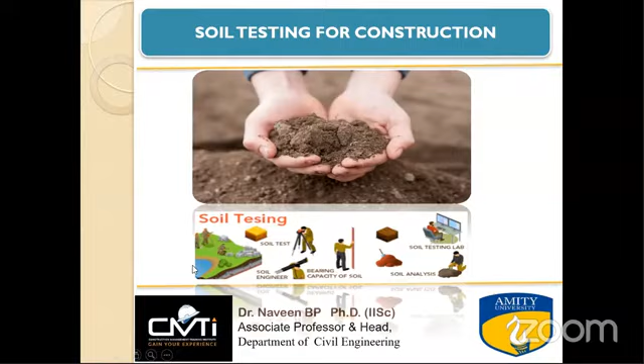And now you are a budding engineer, so you will be going to the interview, or if you suddenly go to the site, someone may ask how to differentiate the sand, silt, and clay, or how to identify the soils. So you should have some thumb rules. Spontaneously, you should be able to identify and answer the questions.

Or a labor may ask, sir, can I terminate the depth of the borehole, or can I stop the boring? As a site engineer or a design engineer, whoever it may be, first you should try to take the soil and feel what type of soil it exactly is, and whether what is coming in the soil report and what you are getting at your current location when you are doing the drilling are the same or not. You should be able to interpret spontaneously and give the decision. There, this field test will play a major role.

Then sieve analysis to make out the type of soil exactly, sand, silt, or clay, how much percentage, and you will be telling whether it is coarse grained or not. Then for construction purpose, another major field test is bulk density. To calculate that, we will be going for the sand replacement method. Then another is compaction, which plays a major role. Then plate load test, then pile load test. This session, I'm only touching the main field testing. These are the very important tests. I'm not discussing the laboratory tests; that I will be covering in the next session.

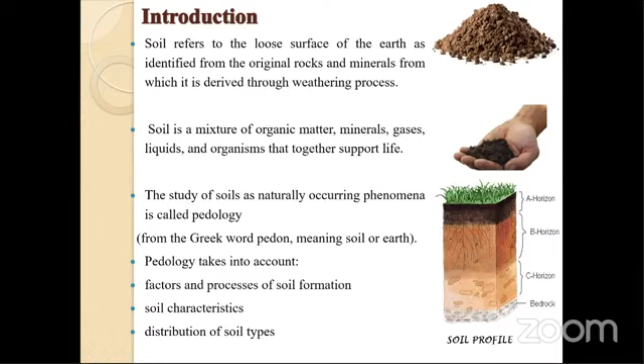So you can see the top layer will be decomposed and this will be the soil. It always depends on the parent material and the minerals it contains, and this is the bedrock where the soil will be formed. That is residual soil as well as transported soil. Before going further, we have to understand how soil is formed. Soil is formed by weathering of rock only, and rock is classified into three major categories: igneous, sedimentary, and metamorphic. This is the process of the rock cycle.

First is magma. The interior of the earth is in a molten state, and that is called magma. Then rocks are formed due to the cooling of this molten material, and these rocks are broken down into soil, and the soil will be converted back into rock. This cycle is called the geological cycle. It takes these 9 steps: magma, crystallization, igneous rock, erosion, sedimentation, sediments and sedimentary rocks, then tectonic burial, metamorphic rocks, and melting. This is the formation.

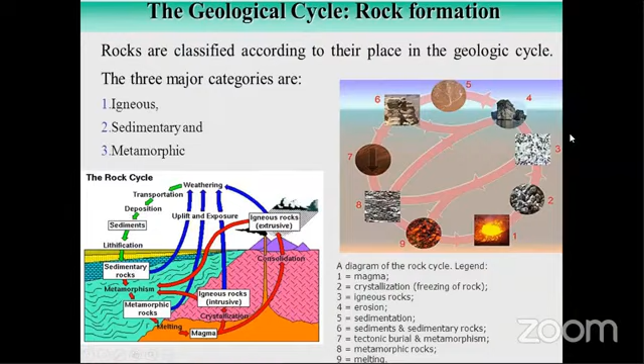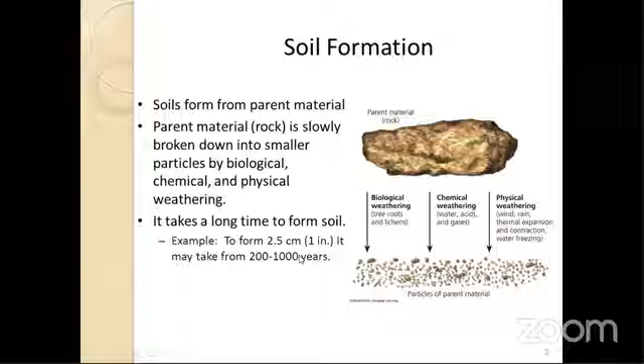See, I told you soil formation is derived from this parent rock because of this weathering action. This is physical weathering; it may be due to wind, rain, thermal expansion. And chemical weathering is nothing but water, acid, and gases. And biological weathering is because of plant roots, everything. You can see, if you want to get 2.5 centimeters of soil, it will take 200 to 1000 years. It will take a long time. See the duration. That's why I was telling.

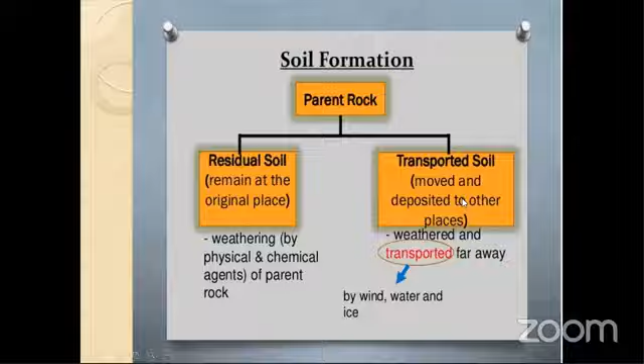Now, this is the rock formation. The main thing is always the parent rock. From the parent rock only, the soil is derived. These are the two major things. One is called residual soil. The residual soil is nothing but the soil which resides at its original place only. That is called residual soil. And this is affected by the physical and chemical agents of the parent rock. And similarly, the transported soil, the name itself indicates it is moved and deposited to another place. The agencies are wind, water, and ice.

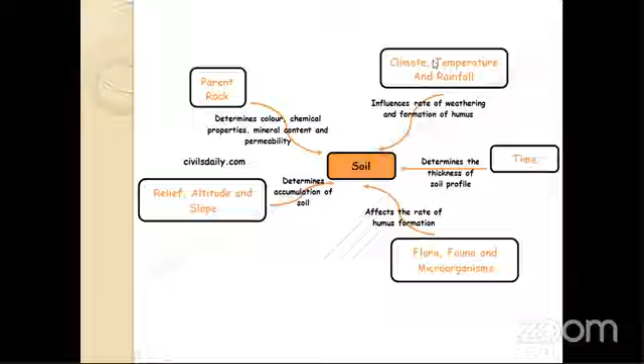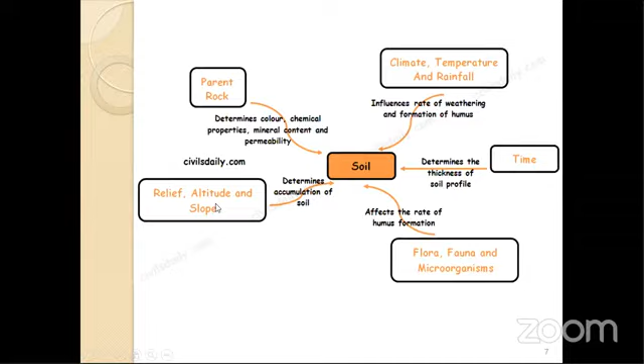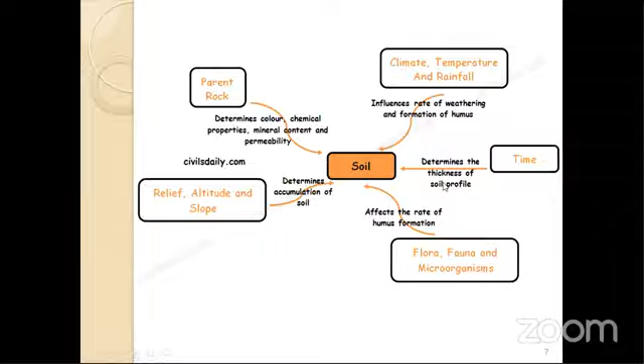And also with respect to time, the layer is decided. If the layer is 2 meters, 3 meters, all will be decided by this. And also topography will decide. Topography is nothing but the slopes, the grade of the slope affecting drainage, erosion, deposition. And climatic condition. This affects the rate of weathering and organic decomposition. So these are the 5 important interacting factors affecting soil formation.

Now, coming to types of soil, you have 6 types. Sandy soil is large in particle, dry and gritty, and has high permeability. In geotechnical terms, as per the thumb rule, it will be 10 to the power of minus 4. And silt is a much smaller particle than sandy material, moisture retentive and drains poorly. When you touch it, it has a soapy texture when wet. And clay, compared to this, is a very fine particle with good water storage quality and low permeability. Here, the permeability value will be 10 to the power of minus 6. Here, it will be 10 to the power of minus 9.

How I am telling minus 5, minus 9, minus 4 is because as civil engineers, we perform a permeability test. On that basis we are able to differentiate the permeability, and based on that we recommend for construction purposes. And the behavior is sticky when wet and smooth when dry. And peat looks dark brown and black in color, has a high water content and is rich in organic matter.

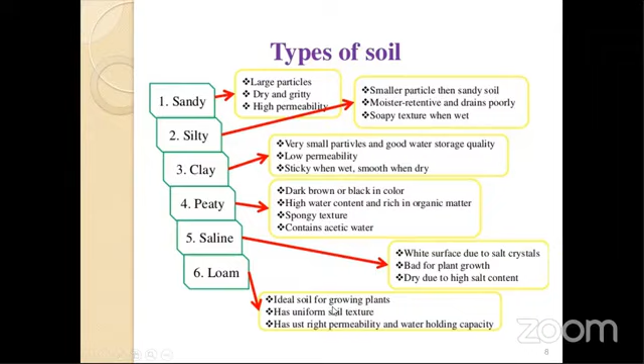And saline soil has a white surface because of salt crystals, is bad for plant growth, and is dry due to the high salt content. And loam, a medium mixture, is the ideal soil for growing. It is a mixture of sand, silt, and clay in proportion with a uniform soil texture, and has the right permeability and water holding capacity. That's why it is good for agricultural or plantation purposes. Now, we will be going to discuss particularly the civil engineering aspect.

Now we are coming to the fine soil. Sand will range in the range of 0.05 to 2 mm. Silt will be 0.002 to 0.05 mm. And clay is less than 2 micron. When you compare, sand is the largest, silt is less than sand, and clay is always the least.

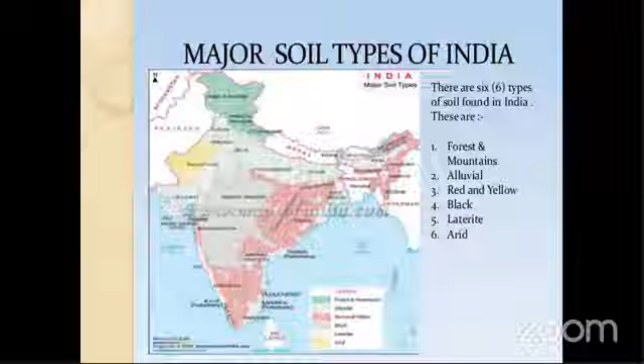This is called alluvial soil. This soil is transported from its place of disintegration by flowing water and deposited along the way. It's known as alluvium. This soil contains a lot of minerals and humus, which makes the soil fertile. This type of soil is identified in Punjab, Haryana, Assam, UP, and Bihar.

Next is black cotton soil, also known as regur. These are black volcanic soils found largely in Karnataka, Raichur, MP, Maharashtra, and southern Gujarat. This soil is quite suitable for cotton. Black cotton soils are highly expansive and not suitable for construction purposes.

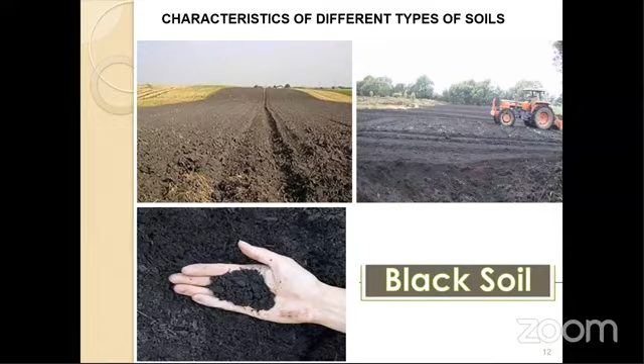Now coming to red soil. Red soils are generally found in Karnataka, Orissa, Tamil Nadu, especially southern Karnataka, southeastern Andhra Pradesh, Manipur, Mizoram, Meghalaya, and Nagaland. These are derived from acid granites. Red soils are always rich in potash and poor in lime and phosphate, mainly due to siliceous and aluminous composition with sand and free quartz.

The red soils are not very fertile. The red color of the soil is not due to high iron content, but is due to a diffusion process, which gives it this red color.

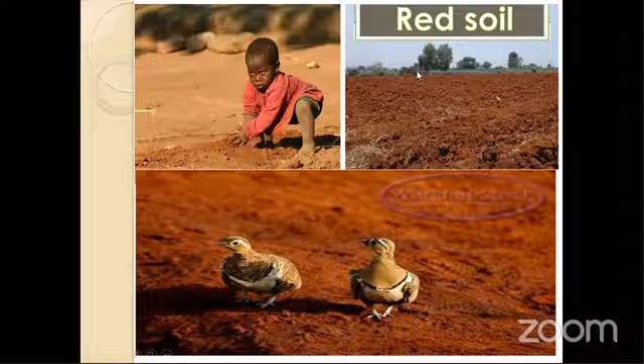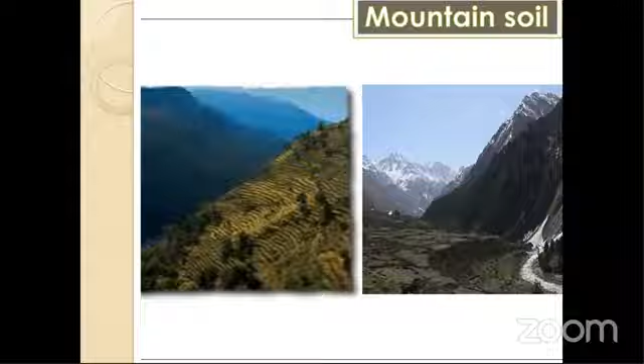Next is peat and marshy soil. This occurs in humid regions and is formed by the accumulation of organic matter. It is black in color, highly acidic, and heavy. This type of soil is seen in Kerala, especially in Kottayam and Alappuzha.

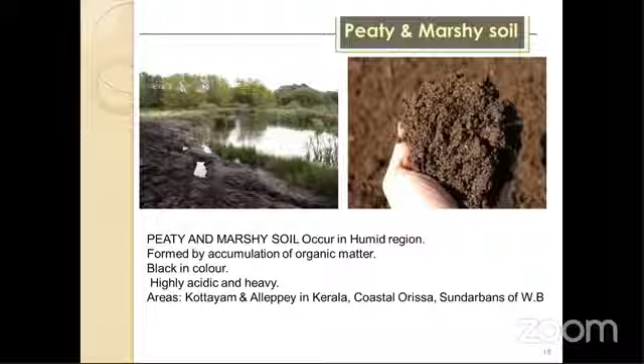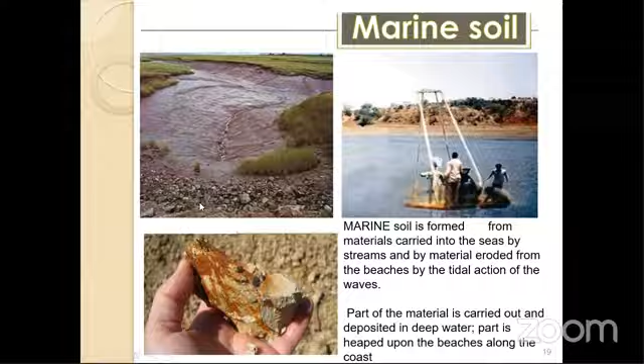This is marine soil, formed from material carried into the sea by streams and material eroded from the beach by the tidal action of waves. Part of the material is carried out and deposited in deep water, while part is heaped upon the beach along the coast. You can see this type of soil along marine coastal areas.

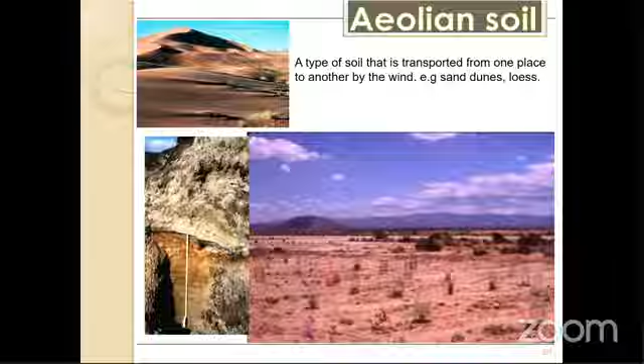And this is aeolian soil. This is transported from one place to another by wind. That's why you see sand dunes — this is all transported material.

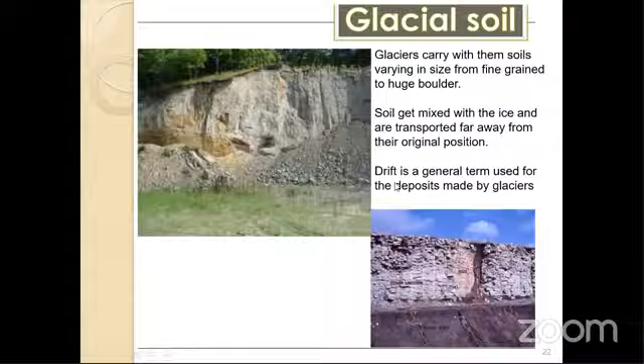Glacier soil carries some soil with varying size from fine grain to huge boulder. The soil gets mixed with ice and transported far away from the original position. Drift is the term generally used for the depositions made by glaciers.

Now we have understood the types of soil. Now, as an engineer, if you go to the site, you should be able to tell properly what type of

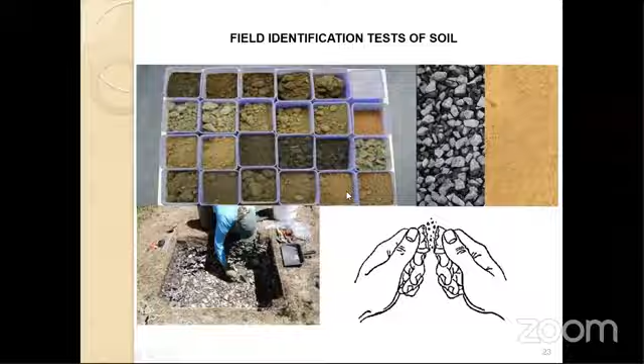soil it is. Now you understand the type of soil, what is the mineral. If you are going to the site, you should be able to predict and recognize different types. You should be able to do a proper reconnaissance survey and predict it spontaneously.

That's why identification of soil types in the field is limited to defining the color, texture, and plasticity, done without the benefit of major equipment. Taking the soil to the laboratory or conducting in-situ tests will require time and money. But instantaneously you should take the decision when making the boring or terminating the pile depth.

So this knowledge is very essential. It is necessary to do a general assessment of the site during the field reconnaissance survey and during the initial phase of work.

Suppose a borehole won't be done in all locations - they will only do it in particular locations. In an entire 60/40 site, they may do 2 boreholes, but your foundation may come in a different location where a borehole has not been done. The foundation is designed based on the borehole soil profile only, but you should cross-check whether the soil you're drilling matches correctly or not. So this type of field testing plays a major role.

Sometimes this test may be sufficient for ordinary work, but in most cases it will only serve as an aid. Detailed and precise identification requires laboratory testing.

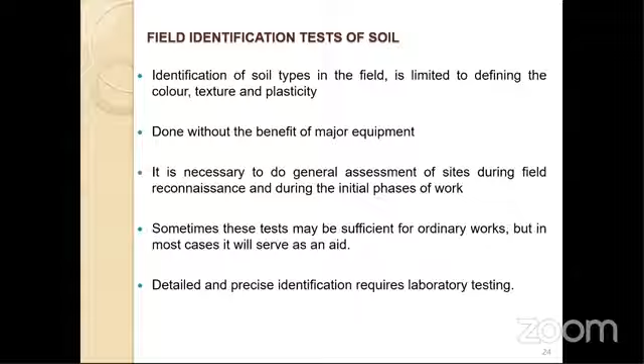If you want to predict exactly the strength, permeability, compressibility - all these specific properties - then you have to collect a disturbed or undisturbed sample, take it to the laboratory, and do all types of testing.

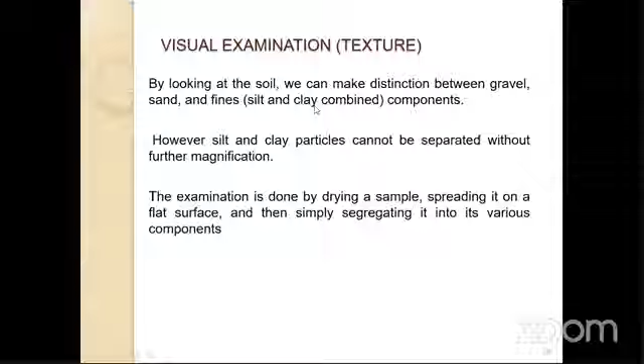When you go for visual testing, how do you do it? By looking at the soil, you can make a distinction between gravel, sand, and fine particles. When you call something fine, it will be a combination of silt and clay, both components. However, silt and clay particles cannot be separated without further magnification. The examination is done by drying a sample, spreading it on a flat surface, then segregating it into the various components - this is the visual test.

When you touch the soil, you will get the feel. If it is rough and gritty, then it will be sand.

Then you do a sedimentation or dispersion test. This test is done by shaking a portion of the sample - you take a soil sample, put it in a glass, shake it, and allow it to settle for some time. Gravel and coarse sand will settle fast, but fine sand will take 30 seconds to less than 5 minutes. Silt may require as much as about an hour, and clay shall remain in suspension for several hours.

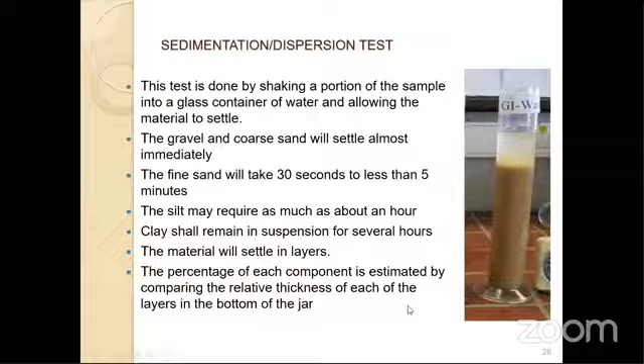This means coarse particles like gravel and sand will settle fast, but silt will take at least 1 hour, while clay will take a long time. Based on this, the percentage of each component is estimated by comparing the relative thickness of each layer at the bottom - that is how you calculate the percentage of each.

One more thing is if you want to calculate the plasticity, in this test you take the soil and press it between your thumb, so you can see, and make a 3 mm thread.

If soil can be rolled into a 3 mm thread with no crack in the sample, that is clay soil. First, you make a small ball and roll it into a 3 mm thread. If there is no crack, then it is clay. If soil rolled into 3 mm but cracks develop on the surface, then it will be silt, or silt with clay, meaning silt percentage is higher than clay. If soil cannot be rolled into a 3 mm thread, it clearly shows it is non-plastic. It may be sand only.

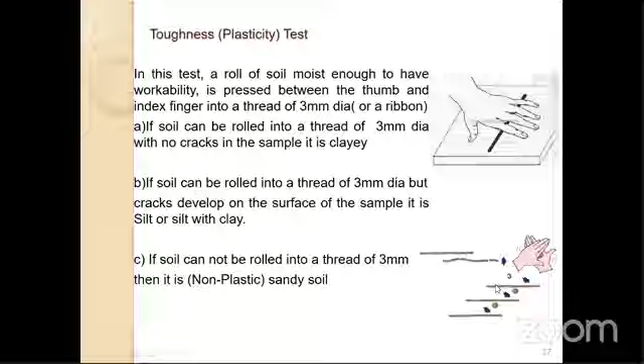Now you are checking the toughness. This is a dry strength or breaking test. You prepare the soil pad and attempt to break the dry pad between the thumbs, like this. If it doesn't break, it means it has very high plastic clay. If it breaks with great effort, it is plastic clay. If it can be broken and powdered easily, then it is silt or silt with clay. If crumbling or powdering occurs while being picked up, then it is silty sand.

So these are all simple things you can do on site immediately.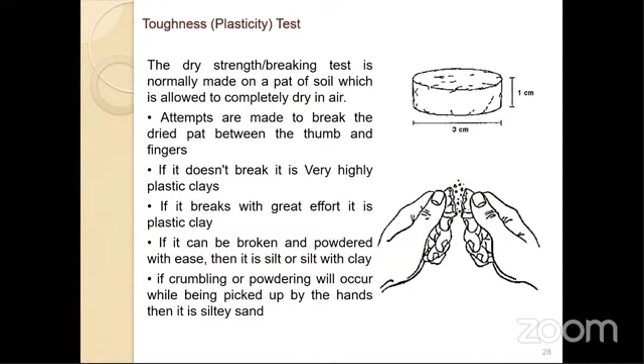See, this is all a simple thing you can do. Then next is...

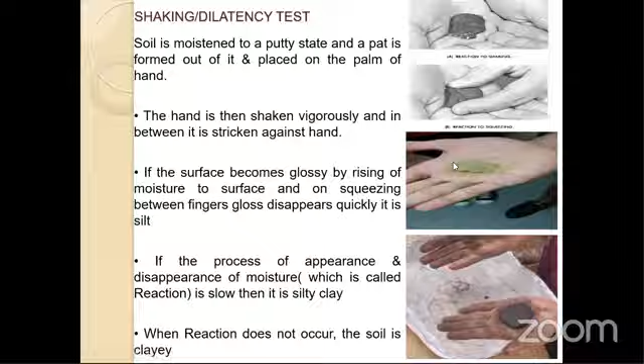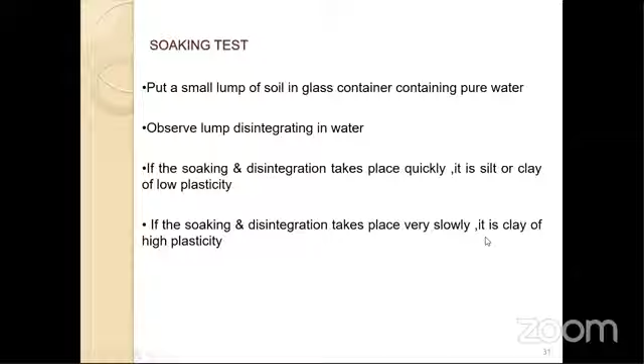Then the soaking test. You take a small lump of soil in a glass container containing pure water and observe the lump disintegrate in the water. If soaking and disintegration take place quickly, then it will be silt or clay of low plasticity. If soaking and disintegration take place very slowly, then definitely it will be clay with high plasticity. See, these are all the things you can observe.

You can see this is a simple test you can perform in the field immediately.

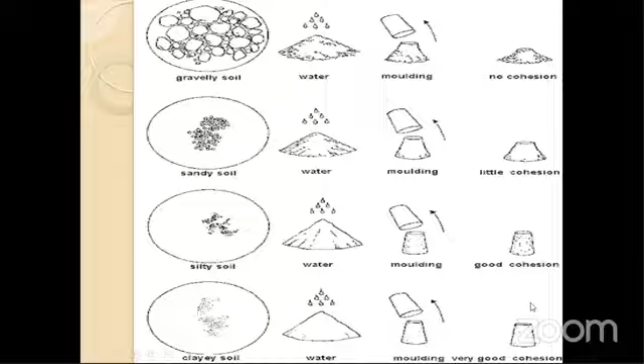After understanding silt, clay, and these tests, now if you want to properly characterize how much percentage of silt, sand, and clay is present, you have different types of sieves like 4.75 mm, 2.36, 1.18, 600 micron, 300 micron, 150, 75 micron, and then a pan. First, you take the soil sample.

First of all, we should understand why we do the sieve analysis. What is the benefit? The sieve analysis always determines the particle size distribution of any given sample, and also helps in easy identification of the soil's mechanical property. This mechanical property helps determine whether the given soil can support the proposed engineered structure. Also, the purpose of this test is to determine the percentage of different grains contained.

See, this is a mixture. If you want to know exactly how much percentage of each, that's why this test is performed - to determine the percentage of different grain sizes contained within the soil. The mechanical or sieve analysis is performed to determine the distribution of coarse, large size particles.

And for finer size, we used to do hydrometer test to determine the distribution of finer particles. See, first you will be taking the soil and you are putting in the sieve and shaking for 15 minutes. This is the sieve set. After that, you will be weighing each sieve. This is called soil retained in each sieve.

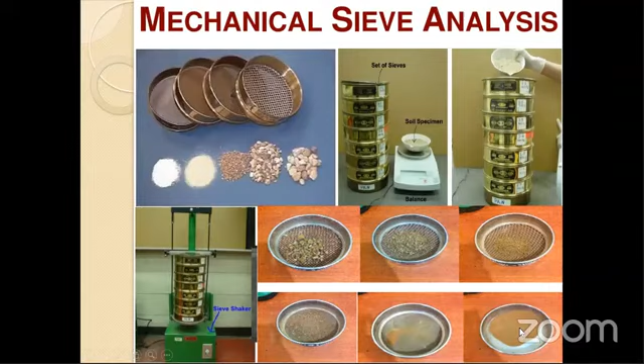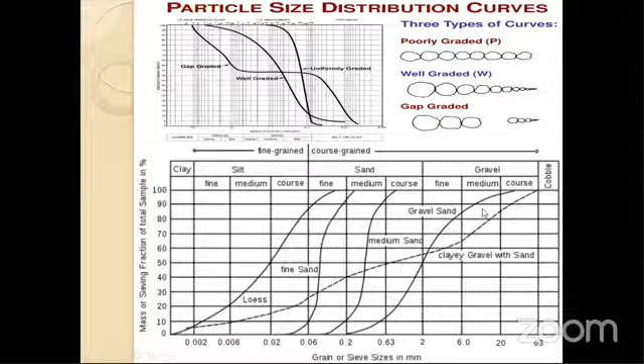See, now we are trying to understand why this field density, especially calculating the bulk density, will play a major role. As you know, the dry density of the compacted soil, and this generally we use for pavement construction for road purposes. The dry density of the compacted soil or a pavement material is a common measure of the amount of compaction achieved during the construction. Therefore, the field density is important as a field control test for the compaction of soil or any other pavement layer you're making.

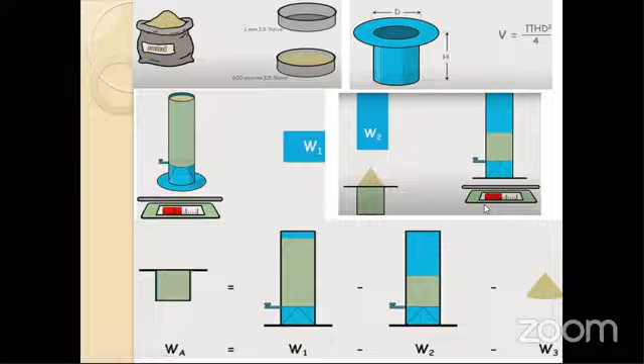First, you are taking the sand passing 1 mm, which is retained on 600 micron, you will be collecting. Then you are calculating the volume. This is the formula. Then you are filling the sand. Then you are measuring. That is called W1. Then you will be putting this in the cone. Then again, after filling this, you will take this and weigh this. This is W2. Then again, you will check how much is in the cone. You will put it in the tray and leave the sand to retain. That will be W3. When you deduct all this, you will get this weight, WA, weight of sand in the container.

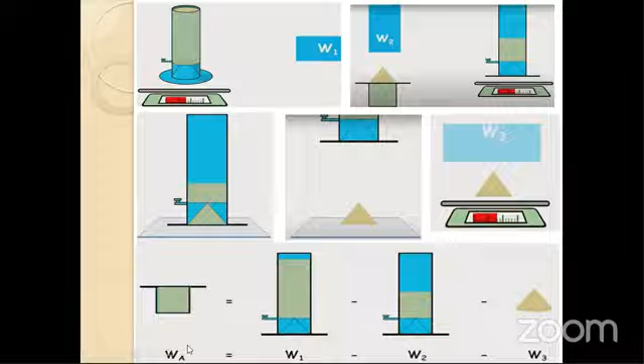Next, same thing only. This is called W3, which I was telling. To check this cone, this is called W3. When you deduct, you will get this WA. And now you want to calculate the bulk unit weight of the sand. So what is the formula? Weight by volume. So now you already calculated WA, you know the volume, you will calculate for the sand.

Now what you want to check in the field. First you will do 15 centimeter excavation. You will put the tray, you will excavate. The excavated soil will be collected in this tray, and you will put the cylinder there and you will make the sand fill. So the excavated soil you are measuring, and also you are measuring this sand container, that is W1. Then when you are filling, this is this. After filling, you are just removing and putting it on the weighing machine, you are measuring. Similar to how you did W3, same thing we are doing. This is the cone. When you deduct it, you will get W poured sand.

Okay, now you are calculating. You already know the density. Now you are calculating the volume of the hole. To calculate the volume of the hole, you already calculated the weight of poured sand, and the density you already know. When you divide, you will get the volume of the hole. And the weight of excavated soil divided by this volume of the hole, you will get the bulk density.

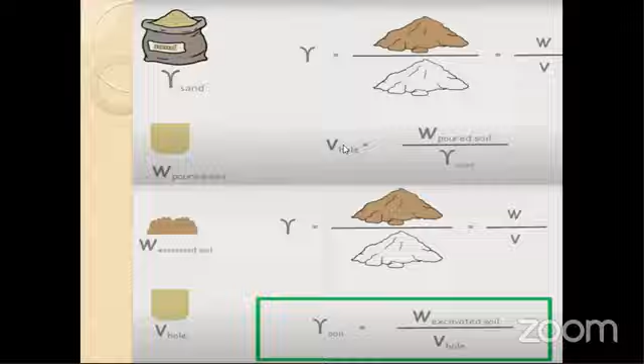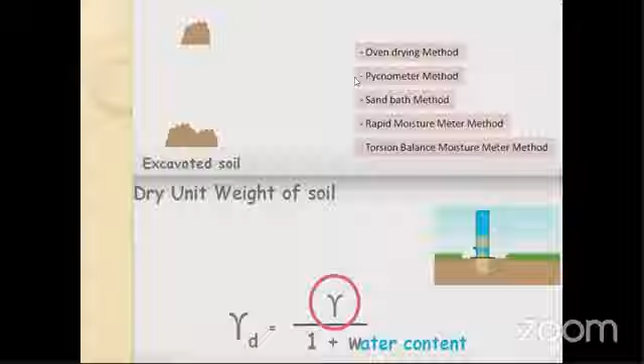After, if you want to calculate the dry density, whatever the soil which you are collecting in the tray, you will be conducting a moisture content test by oven drying method, pycnometer, sand bath method, or rapid moisture content. Any method you can do and calculate the moisture content. Once you calculate the moisture content, just substitute: the bulk density divided by 1 plus water content, and you will get the dry density.

Now we are coming to compaction. First of all, you should understand why compaction plays a major role, especially in civil engineering projects. In the construction of highway embankments, earth dams, or many other engineering structures, loose soil must be compacted to increase its unit weight. To compact the soil is to place it in a dense state. The dense state is achieved through the reduction of air voids in the soil with little or no reduction of water content. This process must not be confused with consolidation, in which the water is squeezed out under the action of a continuous static load.

When you do proper compaction, it increases the strength characteristics of soil, which increases the bearing capacity. You can see this is poor compaction. When you do proper compaction, the bearing capacity increases and the durability also increases. With good compaction, there is higher resistance to deformation and higher resistance to frost damage. This is poor compaction, this is good compaction; you can see the difference. Good compaction increases the stability and decreases the permeability, meaning whatever air voids are present will be closed by proper compaction.

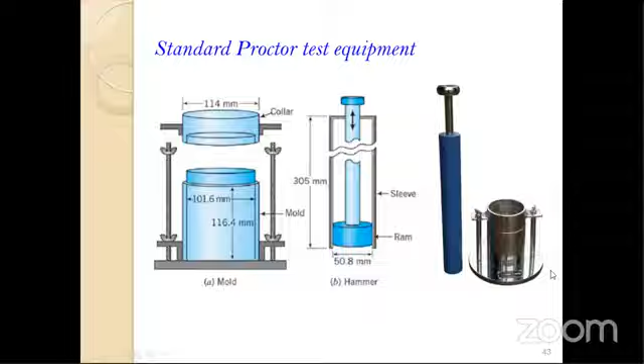This is the standard Proctor test we are using. The internal diameter is 114 on the collar. This is 101.6 mm; this is the mold, and the height is 116. This is the height of the rammer drop, 305 mm. This is the compaction mold. When you take the soil, it will be loose like this. For proper compaction, you are taking the soil and dividing it into layers. This is the 2.5 kg hammer. Each layer you give 25 blows.

First you blow in this direction, 1, 2, in all directions. With each successive blow, the energy is dissipating and the soil is getting compacted. Initially, before compacting, the particles will be like this. When you do proper compaction, the soil is completely packed. To understand it better, this is the loose soil, with so many voids present, air and water. When you do proper compaction in 3 layers, this is the compacted soil.

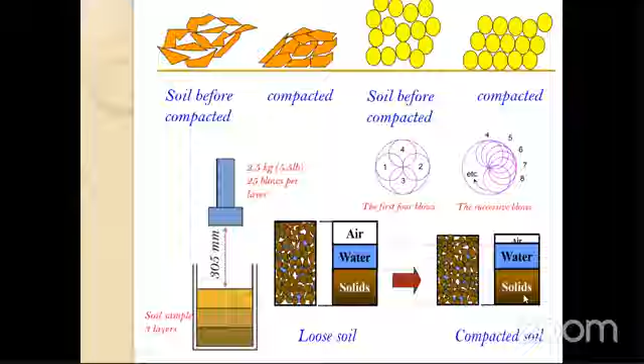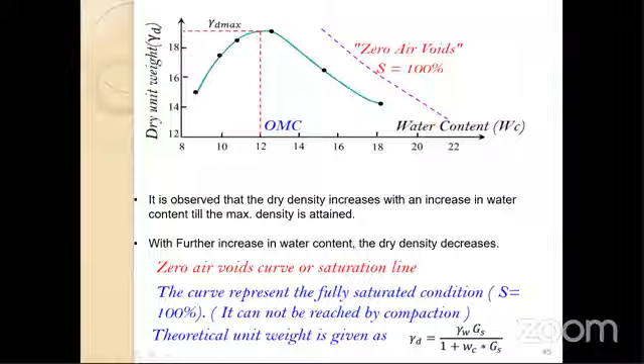The zero air voids line is nothing but the saturation line. This curve represents the fully saturated condition, meaning saturation equals 100%. It cannot be reached by compaction. Theoretically, we use this formula to calculate it. Now we have understood the standard Proctor test.

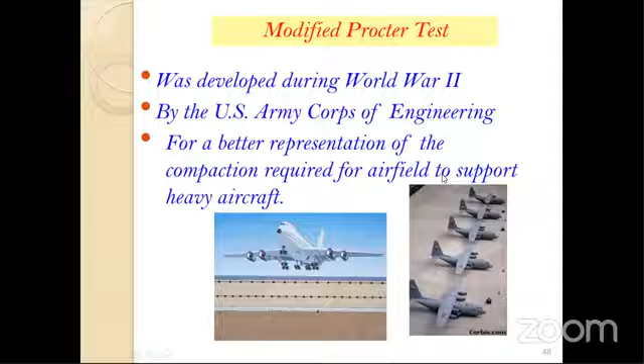Now we have to know the modified Proctor test. This test was developed in the US during World War II by the US Army Corps of Engineers for a better representation of the compaction required for airfields to support heavy aircraft, because the dynamic load is huge there.

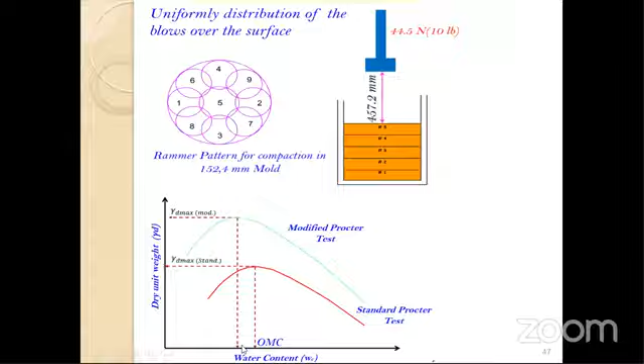In the same procedure, here you will be doing 5 layers, putting in high energy. There you used 2.5 kg; here you are using a 4.5 kg hammer. You are putting in the soil and doing the compaction 1, 2, all around in a circle. The mold is also bigger here. When you compare the standard with the modified compaction, the density is higher and the moisture content will be less because of the greater energy.

Now, when you are talking about the realistic, practical scenario, if you see when you're traveling anywhere, you will see the different types of roller compaction equipment. Generally, 4 types of equipment will be used for compaction: smooth wheel rollers, pneumatic rubber-tired rollers, sheep foot rollers and vibratory rollers.

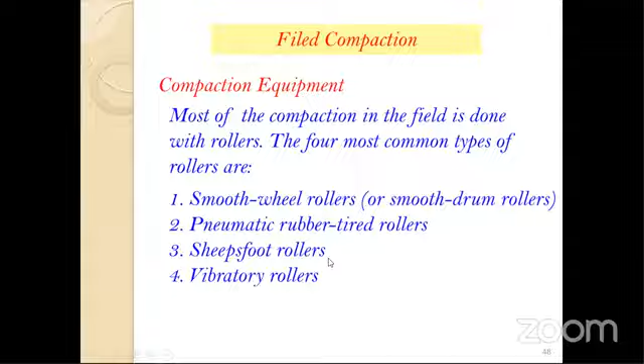You can see this is the compaction equipment. Smooth wheel rollers are suitable for proof rolling subgrades and for the finishing operation of fills with sandy and clay soils. These rollers provide 100% coverage under the wheels with a ground contact pressure as high as 310 to 380 kilonewton per meter square. They are not suitable for producing high unit weight of compaction when used in a thick layer.

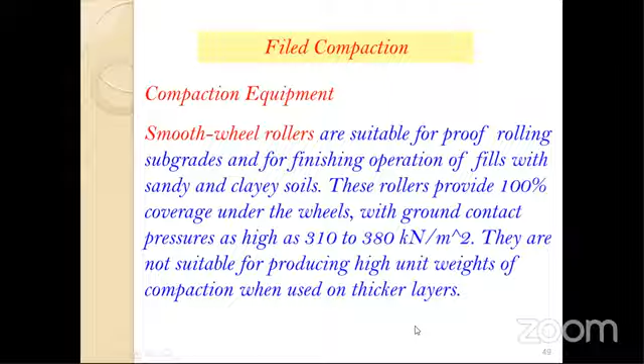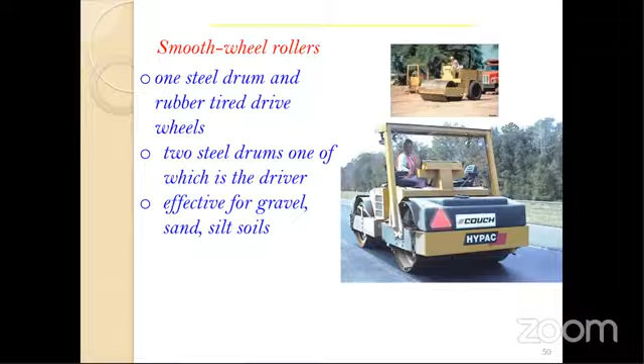Pneumatic rollers can be used for sandy and clay soil compaction. Compaction is achieved by the combination of pressure and kneading. You have seen this type of roller, but now you are understanding why. Suitable types of rollers should be suggested for suitable soils only. You can't use them randomly. And this is the sheep foot roller.

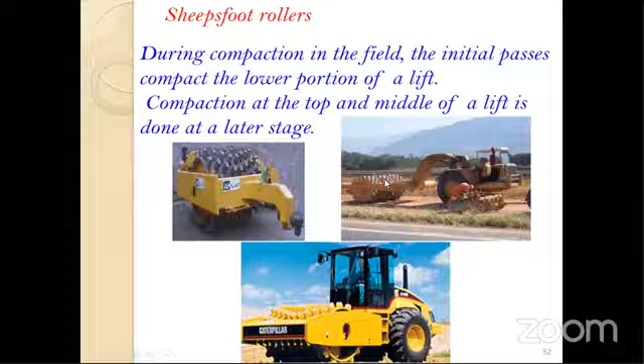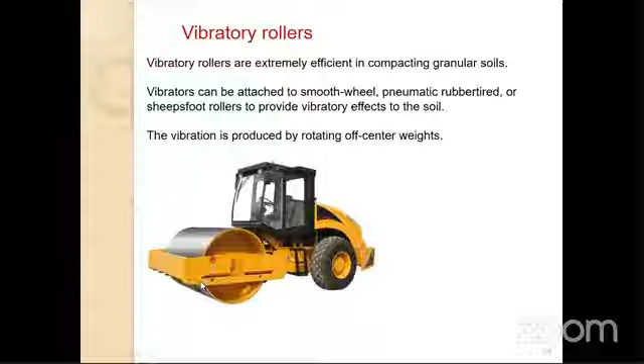During compaction in the field, the initial passes compact the lower portion of the lift; compaction at the top and the middle of the lift is done at a later stage. You can see this type. And this is called vibratory rollers, extremely efficient in compacting granular soil. Vibrators can be attached to smooth wheel or pneumatic rollers. So you can see it is a tire plus drum. The vibration is produced by rotating an off-center weight. See, now you understood compaction.

Now we are coming to the penetration test. Why do we want to do the standard penetration test? It will tell about the thickness of the layer, and also, approximately, based on the N value, you can judge the strength of the soil. And the cost is very less. If you take the soil and do the test, it will take a long time, and financially also. It's an immediate test.

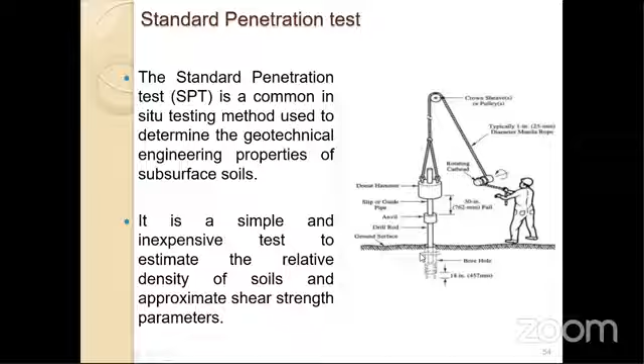First you will be identifying the borehole. This will be 150 mm dia. Then you will be putting the drill rod and making the hammer, that is 65 kg, fall from 75 centimeter height to penetrate 15 centimeter. Based on the blows, the soil is defined by the N values. If N is greater than 50, then we treat this as rock.

Once you have taken the values, proper corrections should be applied. There will be no correction for cohesive soil, and corrections for overburden pressure and dilatancy are given in the code book. These are the corrections applied for cohesionless, sandy soil. We can't use the values we get from the SPT directly, because errors will be there. I will be showing the errors.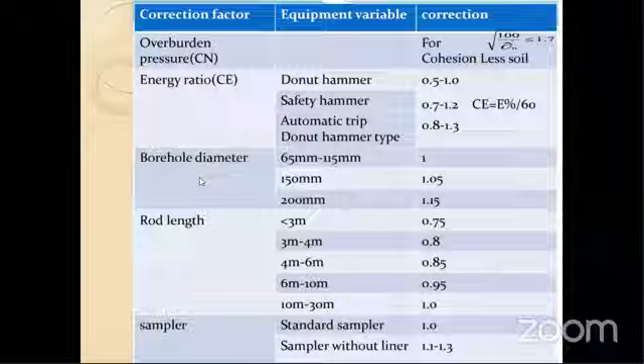This is the correction factor: overburden correction should be applied, and if you are using different types of hammers, you should apply hammer corrections. Then diameter of the borehole: if I'm using a different diameter bore, I should apply the correction. Then rod length, then sampler. Only after doing all the corrections will you get the corrected N value. This will be N60, 60% of energy.

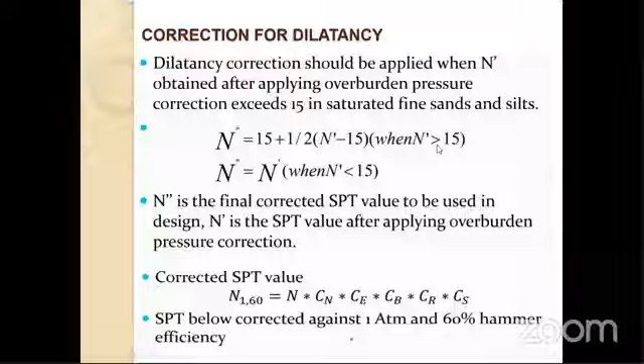That's why the N value we got is multiplied by Cn, Ce, Cb, Cr, Cs. These are nothing but correction factors. Cn is overburden pressure, Ce is energy ratio, Cb borehole diameter correction, Cr rod length, and Cs sampler. Once you apply them, only then use this value. You can't directly use the raw value you get from the SPT. This SPT will be done at every 1.5 meter depth.

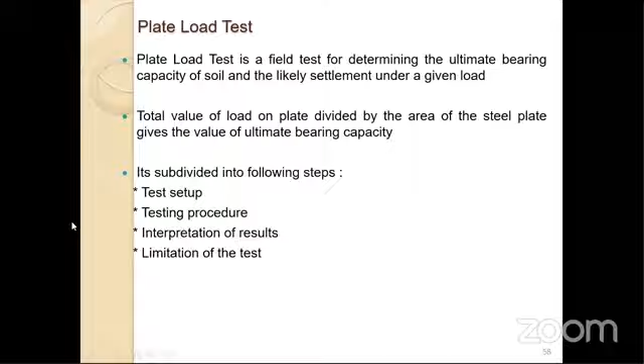And also, to calculate the ultimate bearing capacity of soil, we conduct a plate load test. This will be divided into steps: test setup, test procedure, interpretation of result, and limitation. First, this test can be done by 2 methods. This is called the gravity method, and this is called the truss method.

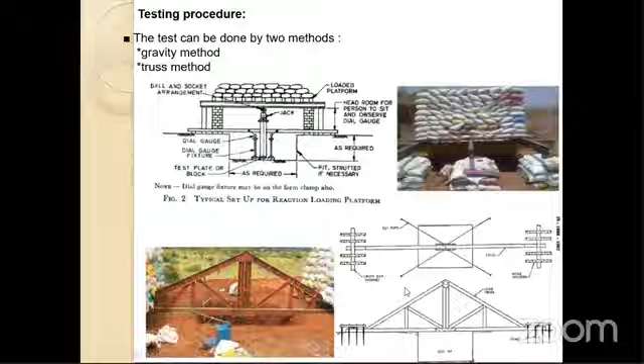And also this plate load test has limitations. This test reflects only the character of the soil located within a depth of less than twice the width of the base plate, because when you are applying load, the pressure bulb created is 2 times the width only. So this is the limitation, and the plate load test, being of short duration, does not give the ultimate settlement, particularly in case of clay soil. That's why this test is recommended for sandy soils.

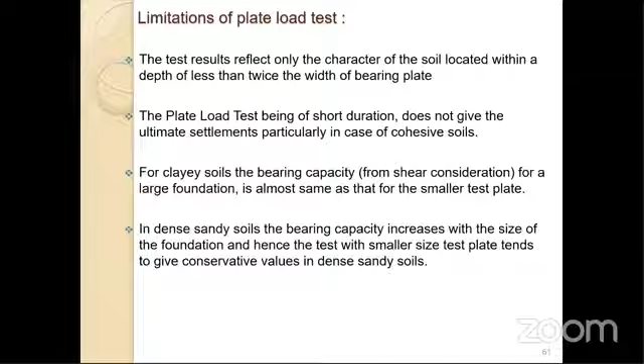For clay soil, the bearing capacity for the large foundation is almost the same as for the smaller test plate. In dense sand, the bearing capacity increases with the size of the foundation, and hence the test with a smaller test plate tends to give a conservative value, especially in dense sandy soil. See, these are all the limitations of the plate load test. So when you are a designer, when you are recommending, you should be very careful.

Now, the plate load test is done for shallow depth. For deep foundations at a deeper depth, we will be going for the pile load test. In the pile load test also you have different types. Same thing, gravity loading. This is the sandbag, and this is the pile. You can see this pipe is going. This loading is done by the sandbag. This is called the hydraulic pump. A gauge is there. This hydraulic load is applied on the pile.

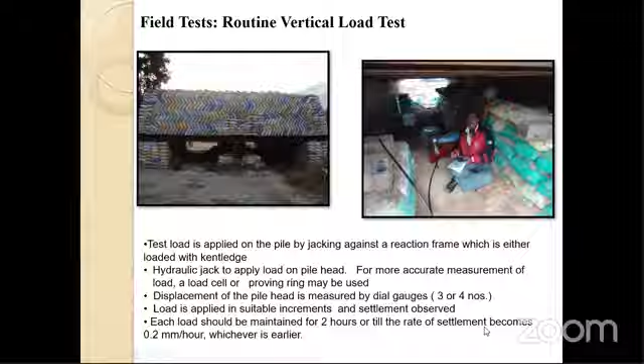For more accuracy, you are putting the dial gauges in all 4 directions, and load is applied, and you are waiting for 2 hours or until the rate of settlement becomes 0.2 mm per hour, whichever is earlier. Till then you have to apply the load, and you should wait for 2 hours or until the rate of settlement becomes 0.2 mm per hour.

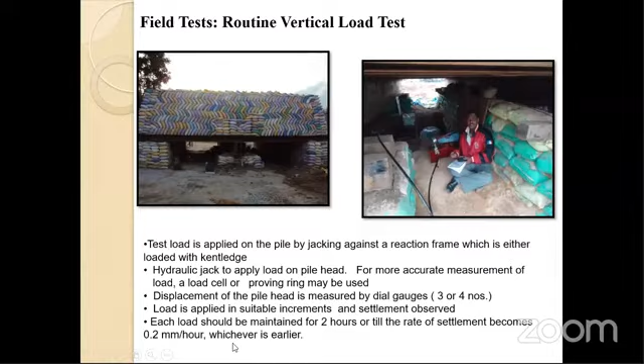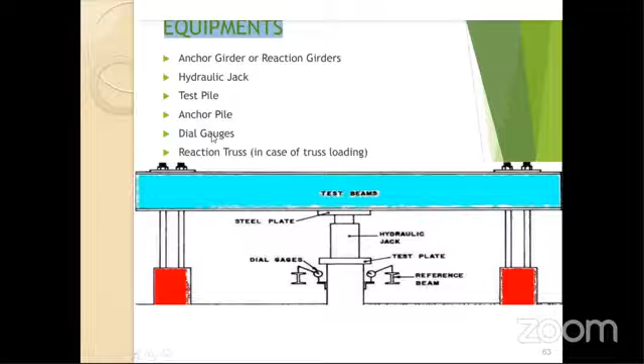See, this is another method. This is called the anchor girder or reaction girder method. The equipment we are using in this method is a hydraulic jack, test pile, anchor pile, dial gauge, and reaction truss. Same thing. See, first the reaction girder or anchor girder is placed at 1.5 times or 2.5 times the diameter. See now, this is the truss method. In soil also we did it; for deep foundations it is the same concept. The objective is to transfer the load.

See, then dial gauges are fixed. With the hydraulic jack, you are applying the load. This is the hydraulic pump. It will be compared, and 3 to 4 dial gauges will be fixed to check the deformation.

At each stage, the loading is maintained till the rate of settlement movement of the pile is not more than 0.1 mm per hour in sandy soil and 0.02 mm per hour in case of clay soil, or maximum 2 hours. Under each load increment, settlements are observed at 0.5, 1, like different intervals, 16 minutes, 20 minutes, like this.

The load should be continued up to twice the safe load. Suppose if you have 10 tons, you should apply the load of 2 times, it means 20 tons, at which the total settlement reaches the specific value. Then load is removed in the same decrement at 1 hour. If you are making loading and unloading, then you will be doing that. The final record is 24 hours after the entire load has been removed.

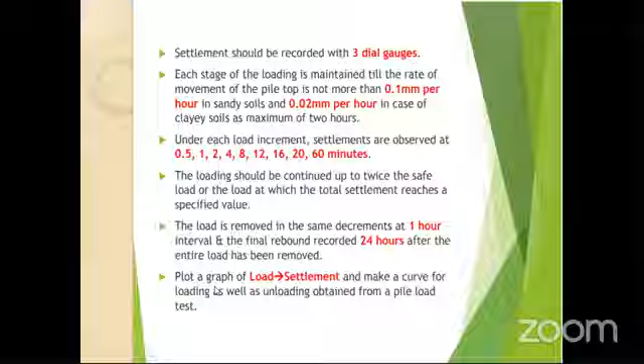Then you are plotting. Each load you have to apply, leave it for 2 hours or till the settlement rate is reached. This is called a loading curve. And when you remove the load, this curve is called unloading. This is loading and this is unloading. After doing that, you can calculate the net settlement. This is the total settlement minus elastic settlement. From that curve, you will get the net pile settlement.

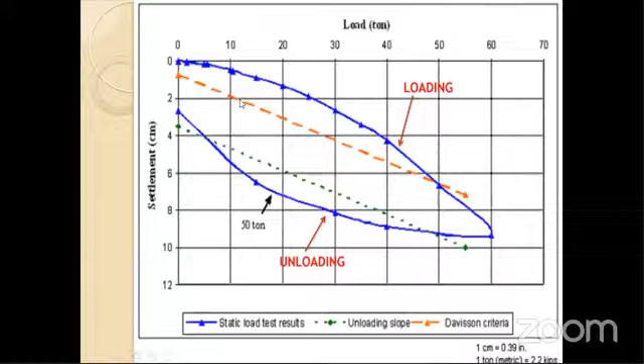From the result, you can see the ultimate load where the load settlement curve becomes either linear or shows a sharp break, as shown in the figure. Sometimes the curve will not be linear. Then you can use the single abscissa, double abscissa method.

And also, as per IS 2911, the safe load should be taken as 1/2 of the load at which the total settlement is equal to 10% of the diameter. The second condition is 2/3 of the final load at which the total settlement is 12 mm. And the third one is 2/3 of the final load which causes a net settlement of 6 mm. When you are conducting the load test of a pile, you should satisfy any one of these conditions. Then only your results will be accepted.